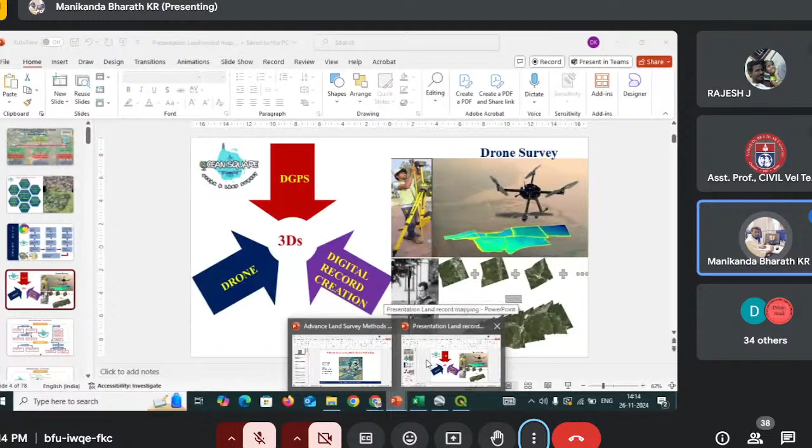The topic given is advanced land survey methods and technology. This is the topic given, but the FDP topic is recent advancements in geotechnical engineering. So we'll discuss advanced land survey methods and technology and how it is effective or useful in the geotechnical engineering aspect, covering this across 53 slides. I have two presentations, one will be 53 slides and one will be 78, so don't worry, the most important things will be explained.

These are mostly theory content, and we also have images. I will explain the theory content within a span of 30 seconds or so for what is given, so you can go through the PPT chat for that. Mostly we'll be going through the images, and I will be explaining them. For a period of 45 to 50 minutes, these two presentations will be covered.

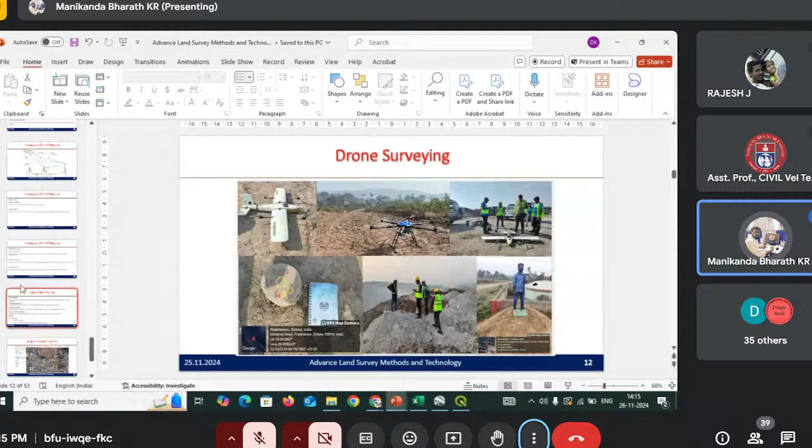Then afterwards, I have two videos which we recorded in our initial working days, which I can also share - I have a hyperlink video regarding RTK DGPS, how it will be operated, how the points are obtained, and also regarding drone surveying, how the mapping will be done. So some half video will be available. For the last half an hour, these two videos will be shared, and I will explain by pausing the videos.

This will be the presentation format, so I will just dive into the presentation. Advanced land survey methods and technology - how it is useful in geotechnical engineering.

Survey methods go hand in hand with geotechnical engineering, mostly when dealing with geotechnical work like metro projects. In metro projects, mostly in underground earthwork excavation, geotechnical engineers come into play. For those geotechnical engineers, surveying is most important - they will be seeing the slope line, slope stability, and the retaining walls. For all those things, surveying is essential. So in those aspects, what are the advanced survey methods available?

I'm not going to touch even about total station because it has also become outdated. The recent trends are RTK DGPS survey - that is real-time kinematic differential global positioning system - then drone surveying, that is unmanned air vehicle, then LiDAR, then 3D laser scanning. Then GIS and remote sensing comes into place.

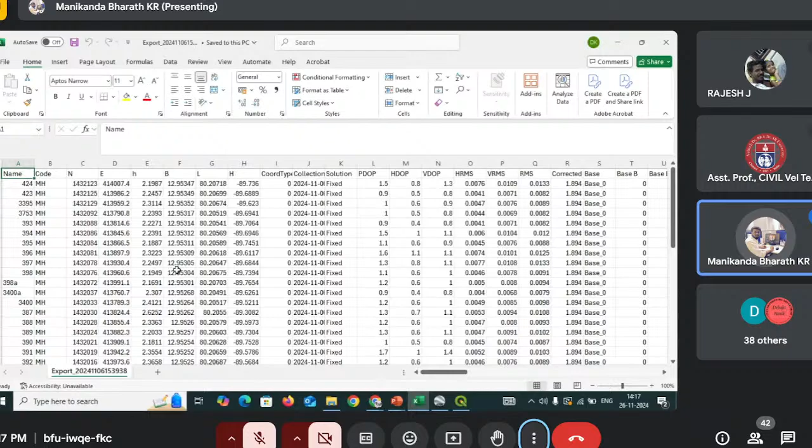After doing all the surveys, it will be mapped and those points will be obtained. With these two slides, I will also explain how those values are obtained in the comma separated value - CSV - and in Google Earth Pro KML format, keyhole markup language, how it is obtained and how this data is input into the QGIS software, that is quantum GIS software, and how the projects are going on. Since it is an industry perspective, I will also explain regarding real-time projects and the industry perspective.

So why these advanced land survey methods and technology? For improved precision and efficiency in geotechnical engineering - traditional methods like chain surveying are all traditional methods, and to improve precision and efficiency, we are going to advanced land survey methods and technology. That's an important thing. So what is land surveying and geotechnical engineering? Land surveying is the measurement and mapping of land.

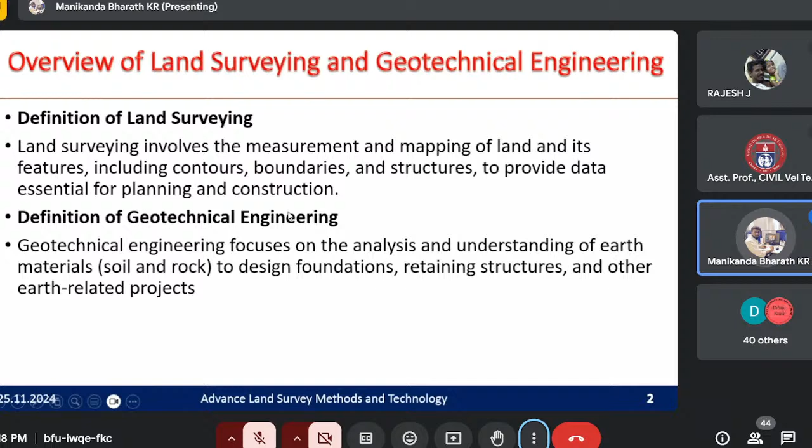So that is land surveying. Geotechnical engineering involves understanding of earth materials, that is soil and rock, to design foundations. So this is with respect to the definitions.

So the overview of land surveying and geotechnical engineering, and the relationship and importance, how land surveying is related to geotechnical engineering. These are interdependent disciplines, working together to ensure safe and efficient infrastructure development.

How is it important? Accurate terrain modeling, site investigations, and foundation design. For example, land surveying provides precise topographical data, which is essential for geotechnical engineers to analyze site conditions like slope stability and drainage patterns.

For example, in mining areas, it will mostly be subjected to slopes, and in metro projects also it will be subjected to slopes underground. So to understand slope stability, land surveying methods will be employed. Also site investigation, for example boreholes, trenches, geophysical surveys. If you're doing boreholes, those can be marked in the DGPS survey, and the latitude, longitude, elevation of those boreholes can be obtained. That is how it is interrelated.

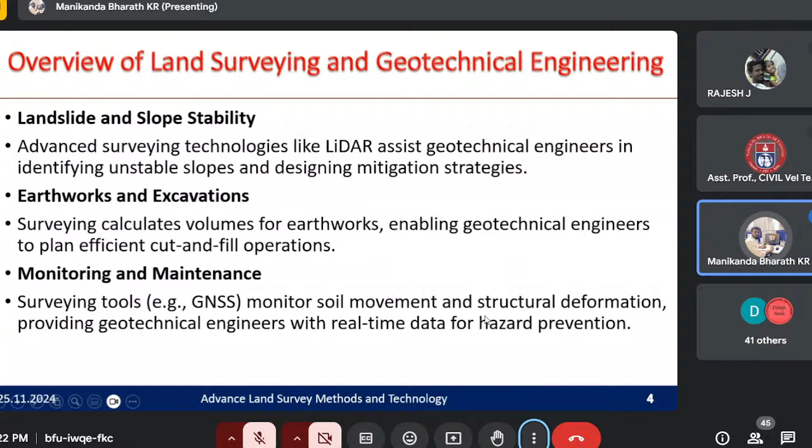So these tools are used for monitoring soil movement and structural deformation, such as soil erosion, and settlement can also be obtained. This gives improved accuracy in subsurface investigations versus limited precision in manual methods. Traditional surveying challenges in geotechnical work include time-consuming processes and difficulty with inaccessibility.

For example, with land surveying and even total station, it may be difficult to reach inaccessible areas. For example, if climbing a steep slope in a hilly region using the total station, a surveyor may find difficulty moving up the hill area. In those situations, we can use a drone survey, an unmanned air vehicle, which can be used to plot the latitude, longitude, and elevation of particular slopes. Using that, we can easily find out the data.

Traditional methods are time-consuming processes, whereas these modern advanced surveying methods can finish the work in quick time. So that is with respect to how advanced land survey methods are in hand. It goes hand in hand with geotechnical work, that is how it is related.

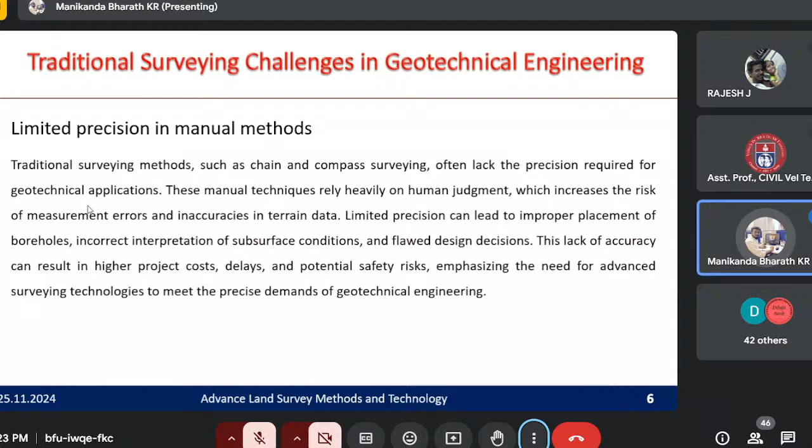Then the ground penetrating radar, GPR. We call it GPR survey. For example, in Chennai metropolitan city, we have a water network and sewer network. The water network is for drinking water, and the sewer network is for drainage purposes. Water is supplied through pipelines from the metro water department to households, and drainage is collected and connected to manholes, through which the sewer network is carried out.

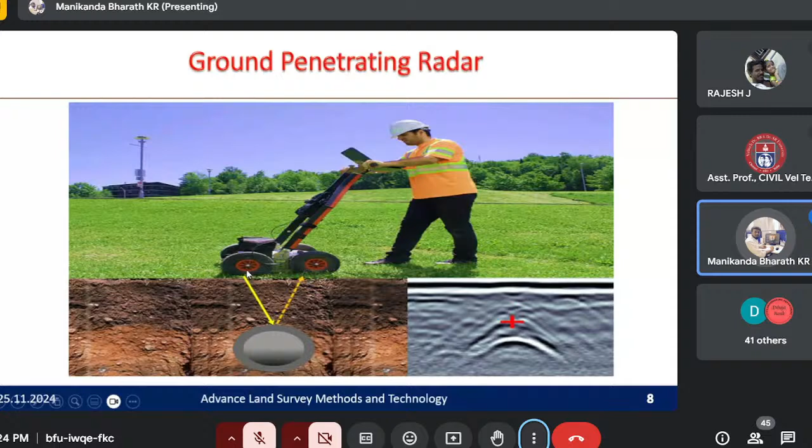For example, if there is a leakage in a particular pipeline, using this ground penetrating radar, it is moved on the road to find where the pipeline is located, at a particular depth of maybe 10 meters, 20 meters. This is how ground penetrating radar works - it sends signals and measures the time taken to reach back, and by this we can identify exactly where the pipe location is.

All this data is obtained and processed - that processing is the most important thing. Using drone surveying, we can find out the latitude, longitude, and elevation of a building by just flying the drone around it. All these things can be done, and we can also give the plan of the existing building.

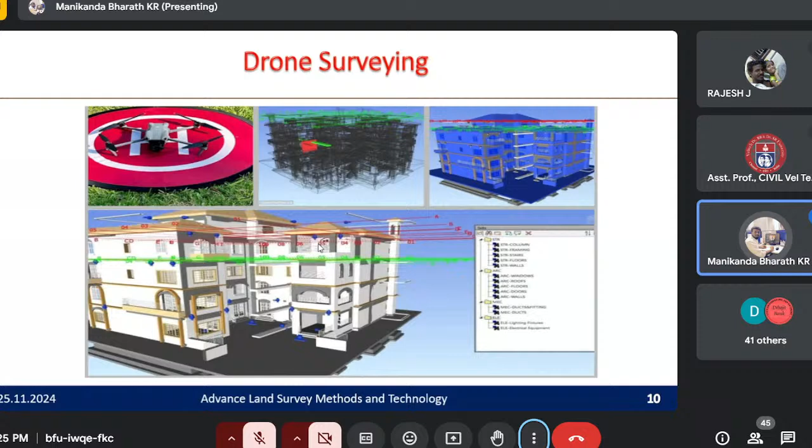For example, we were involved in a project in Kannagi Nagar in Chennai - you can see the drone surveying here. Why was this project done? The Kannagi Nagar buildings have water tanks placed on them, so the elevation of these water tanks, the trees planted near the buildings, and the road elevation and alignment - all of these things can easily be mapped within a span of 2 hours.

Kannagi Nagar is a big area where residents live in apartment-type buildings. All these things can be mapped using the drone. But before that, we have to get permission from the authorities, as there are red zones, yellow zones, and so on. We have to get permission from concerned authorities if it is a red zone. So this is drone surveying, you can see here.

This is what we call in normal surveying a benchmark or ground control point. This ground control point has established latitude, longitude, and elevation. Over a period of 8 to 36 hours, surveyors would have done static DGPS surveying to finalize the latitude, longitude, and elevation of this particular point and made it a permanent benchmark - that is the ground control point. Since we know these values, we can mark them at the base station, and those values can be fed into the rover.

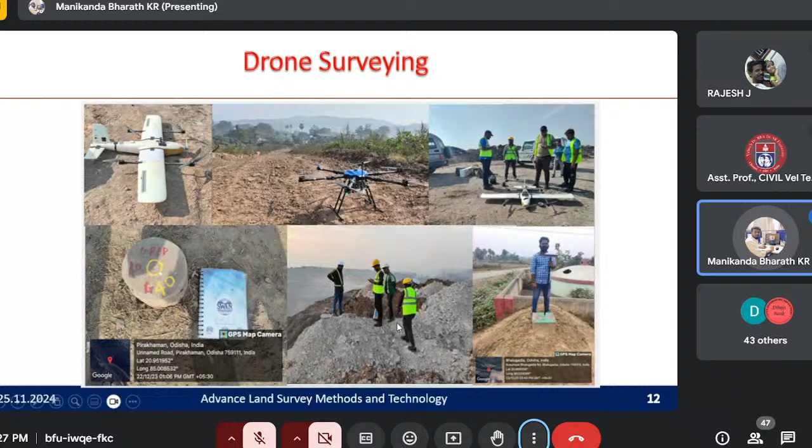This is the rover, we call it a rover or receiver unit. Using this, we can send satellite signals to the drone. This is used for quarry or mining purposes also - you can see the ground control points here, with UAV drone data accompanied by high resolution imagery.

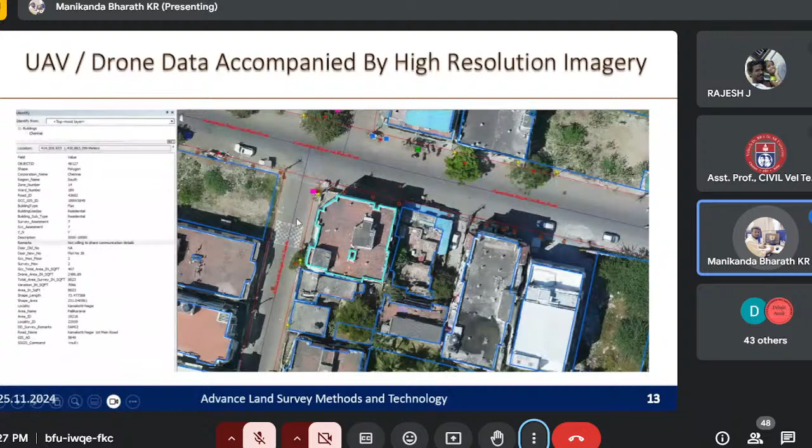After obtaining the data, this is the high resolution image obtained, which was done in Kannagi Nagar. After obtaining this, we can see the road alignment and width - we can measure the width of the road. You can see trees planted here, and we can count the number of trees. For example, in a planned city, we need trees to be in proper alignment along the road, so these things can be monitored using these surveys. That is what I'm trying to say.

So advanced land survey technologies. Moving on from drone surveying, lidar. Lidar in geotechnical applications.

How is lidar useful? Lidar is light detection and ranging. First, using this lidar, they will be sending some laser pulses. Lidar systems emit laser pulses that travel toward the ground and reflect back to the sensor. The time it takes for the pulse to return is used to calculate distances. So they send pulses, it reflects back to the sensor, and the time taken is used to calculate distance. That is the simple basic thing. Using this, they will be creating...

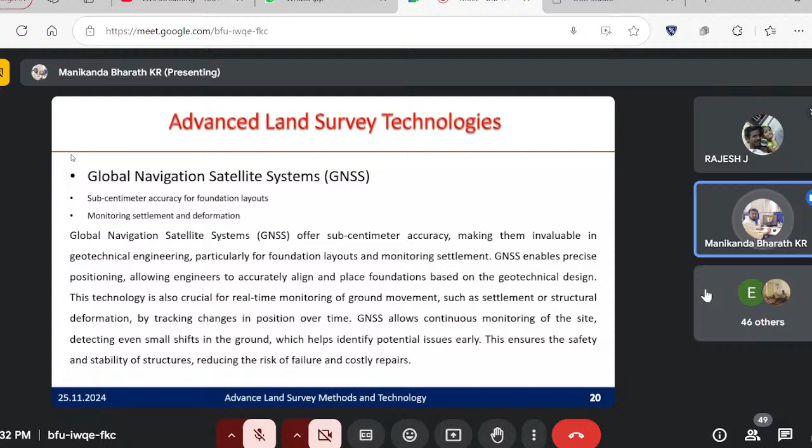It plays a major role in monitoring the settlement and the deformation.

Then drones and UAVs: rapid aerial surveys of construction sites and terrains, then real-time data integration. So how does this drone work? They will be equipped with some sensors and cameras. What are the cameras? RGB cameras, thermal cameras, and lidar also will be employed in the drones. So those drones will have some more weight. Then photogrammetry systems will also be employed.

So these cameras will capture the images and transport them in real time to the base station, and those things can be viewed from the site also. UAVs fly over construction sites or terrains, capturing aerial images or lidar point clouds. So what can we obtain: detailed imagery, elevation data, and subsurface conditions. How can subsurface conditions be obtained? Through thermal or lidar scanning, it can be obtained.

So photogrammetry uses overlapping images to create detailed and georeferenced 3D models of the site. Then the obtained data from the drone will be processed. How will it be processed? Data collected by UAVs is transmitted to a base station. I will be showing images of these base station things for easy understanding in the upcoming slides.

So data will be transmitted to the base station, and in that base station it will be processed. How will it be processed? Using software like Pix4D or Agisoft Metashape. You can see here the images I have shown, right? So this is how it will be processed.

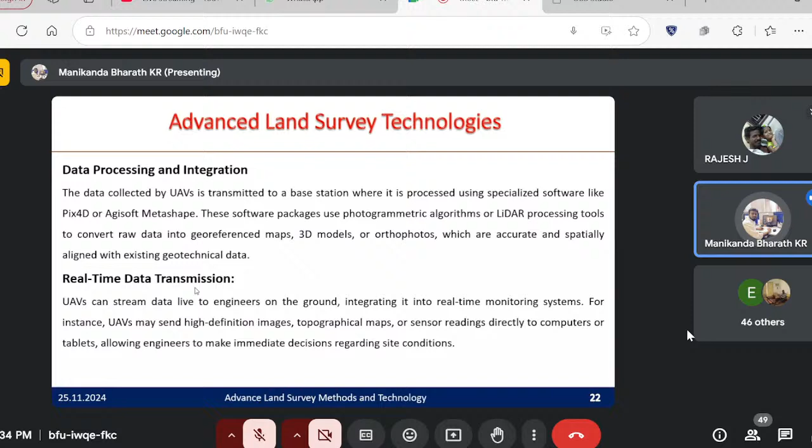Then analysis and site monitoring: we can get borehole information, soil analysis, and geophysical surveys. The data obtained from the drone can be overlaid with existing geotechnical data. For example, you would have the bore log report, and with that bore log report we can use the processed data - borehole information, the distance between boreholes, the exact elevation, latitude, longitude of that borehole, and the type of soil available.

So all those things can be used to detect anomalies also. For example, rapid identification of soil instability or drainage issues can be assessed by comparing 3D models of the site over time. That is what I'm explaining: if you do a drone survey today, and do another drone survey in one week's time, over that period of time, how it is changing.

If that site is subjected to some slope instability, over a period of time we can identify how much it is affecting using these surveys, looking for signs of deformation and erosion. So this enables enhanced decision making, and these things can be done within a short period of time.

Moving on to 3D laser scanning, this is also one of the advanced land survey methods. Using 3D laser scanning, we can capture rock mass structures and subsurface data. This also employs lidar, light detection and ranging.

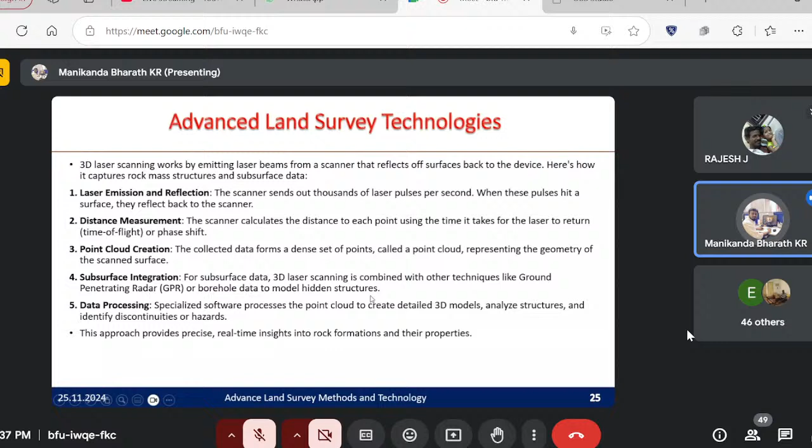Moving on to GIS and remote sensing. All the data obtained from drones and 3D laser scanning will be processed in software like Pix4D and Agisoft. Then in DGPS, we obtain some data, and all those data can be marked in the GIS.

GIS is a geographical information system. Real-time point data will be collected in a format called KML, keyhole markup language, or CSV, comma separated value, which is similar to an Excel sheet. Those files can be imported into software called QGIS and ArcGIS.

Using that, points, lines, and polygons can be plotted. Then we can give attributes to those points, lines, and polygons, and form it as a geodatabase, GDB. It can be used for future purposes for easy understanding of where it is located.

For sewer networks and water networks, currently CMWSSB, Chennai Metro Water Supply and Sewerage Board, is mapping the water and sewer network for easy understanding. Wherever they are providing drainage system or water network, they're mapping it using RTK DGPS survey. All of this is being completed within 2025.

So in future, if there is any leakage in a particular house or street, it can be easily identified. Just like in Google Maps we go from our home to Central Railway Station by typing the name, likewise the points obtained using the DGPS survey will be available with the Metro Department officials.

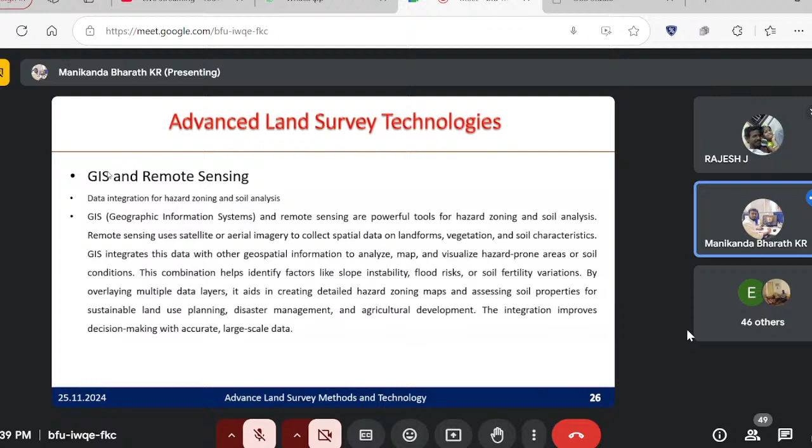Then remote sensing: using remote sensing satellites, artificial intelligence is also used now. You would have come across the open source software called Google Earth Engine, which uses Python programming. Using Python programs, they obtain satellite images, and those images are processed. Using those satellite images, we can also obtain soil data sets, which I will show in upcoming slides.

With that soil data set, we can see whether it is a clay region for 0 to 25 centimeters, 25 to 50 centimeters, then up to 150 centimeters, we can obtain the soil data sets throughout the world. That is with respect to remote sensing.

After obtaining the soil data set, we can map it, and it is also useful for research purposes. If you are writing a paper where you are working on clay soil, you can just map where it is located using these remote sensing satellites.

Then it is integrated into GIS software, that is QGIS and ArcGIS. So you can see soil maps, geological data, and climate data also can be used. Then layers like slope, elevation, land use, land cover also can be done. For example, flood zones and landslide prone areas can also be marked. This is how it is related.

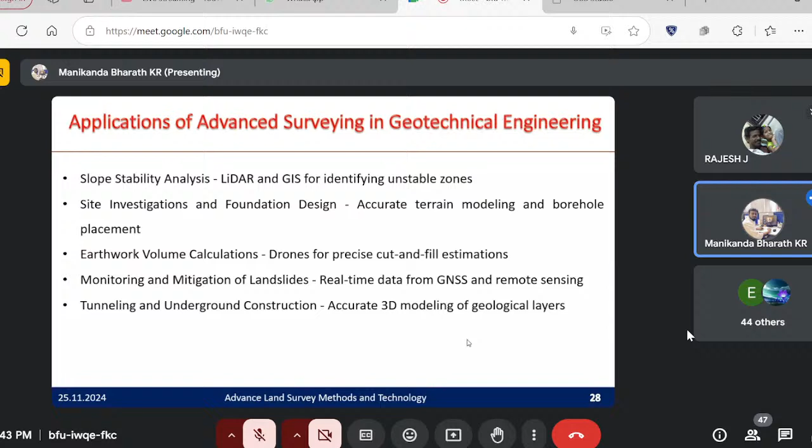Then smart geotechnical monitoring systems - integration of IoT sensors, Internet of Things, and surveying technology. Sensors can be placed such as strain gauges, inclinometers, and piezometers to collect data on parameters like soil movement, stress, and groundwater level.

These strain gauges can be placed on a particular surface, and for example, if there is movement in the soil, or if a particular place is exposed to more stress, or if the groundwater level increases, it will be notified to the sensors. Using that, they can easily find out the values. This is how these sensors transmit data wirelessly to centralized systems for analysis.

Surveying technologies like GPS and LIDAR complement this by providing precise spatial and topographical measurements. The integration enables continuous monitoring, early warning of potential hazards, and data-driven decision making. These systems are widely used in infrastructure projects, for example mining and landslide areas, to enhance safety, efficiency, and sustainability.

So how it is done is explained here. First, they deploy the IoT sensors - strain gauges, piezometers, and inclinometers. Then they collect the data, which is transmitted wirelessly. Then using that data, surveying integration is done - using GPS for localization and LIDAR for accurate spatial context.

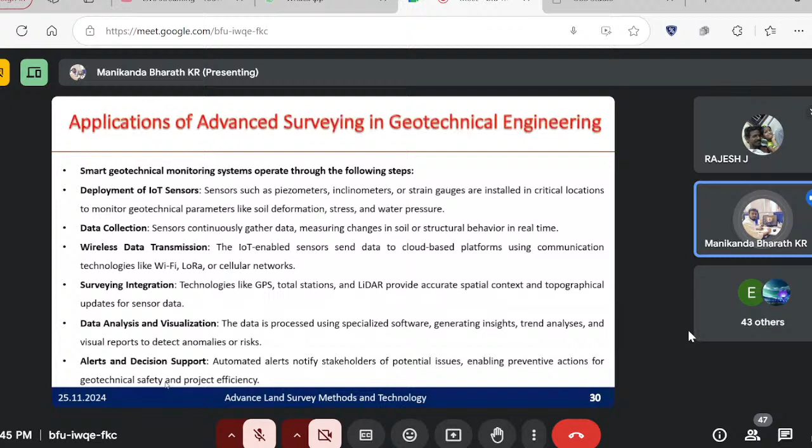Using that, they will be plotting in the software. Then the data will be analyzed and visualized. Then alerts - after visualizing, they will give alerts whether the soil has moved, whether the soil is eroded, or whether some settlement has occurred, whether the slope has increased, or whether the vertical steepness has increased. So all those things can be employed.

So up to this point, we have seen the advanced land survey methods - that is drone surveying, UAV, unmanned aerial vehicle. Then RTK DGPS survey I'll cover in the upcoming slides. Then we have gone through LIDAR, light detection and ranging, and 3D laser scanning also.

GNSS, that is navigation satellite systems, plays a major role in DGPS survey. We have images showing how it works. If all these things are done, we can find out slope stability, foundation marking, foundation layouts, soil movement, and settlement of soil. All these are also done in tunneling. This is how advanced land survey methods are useful in geotechnical engineering. The two most important points are improved accuracy and efficiency in the shortest span of time.

In the Oysand region in Norway, this project focused on a man-made slope affected by freezing and thawing cycles. They conducted field and laboratory tests, then undertook numerical simulations to understand slope stability factors, employing techniques like finite element modeling and geotechnical monitoring systems.

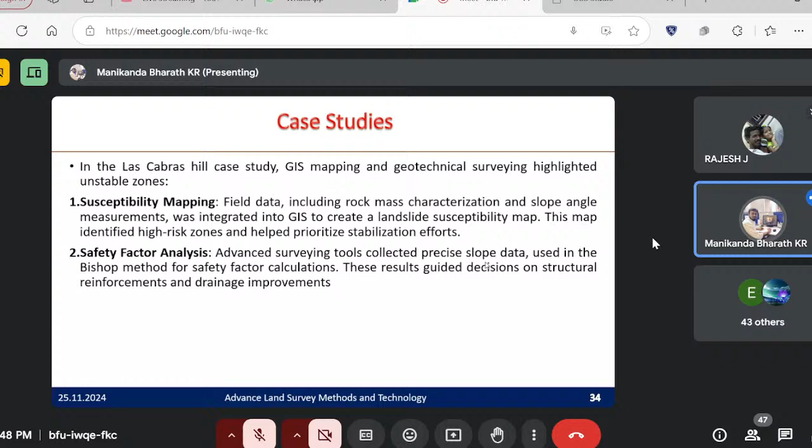Advanced surveying tools collect precise slope data, again using aerial survey and LiDAR scanning, with respect to slope stabilization. That is a successful use of advanced surveying in slope stabilization, and that concludes the first case study.

Moving on to another case study: integration of GNSS and LiDAR in large-scale infrastructure projects, specifically the high-speed rail project in California. I'll explain the background. The California high speed rail project is the largest infrastructure initiative in the United States, a 520-mile network.

It involves large-scale earthworks, viaducts, tunnels, and station facilities, both underground and on the surface. Given the scale and technical challenges, precise mapping, alignment, and monitoring are essential to ensure the success of the project. The objective is to enhance survey accuracy, streamline the construction process, and ensure proper alignment for the rail system.

As I already said, Chennai Metro also employs these advanced surveying techniques. Some surveyors use total stations, others use RTK DGPS survey. With RTK DGPS survey, real-time kinematic, when you move the rover in real time, it gives latitude, longitude, and elevation. Using that, we can mark points and determine the alignment, whether it's a straight line or a curved line.

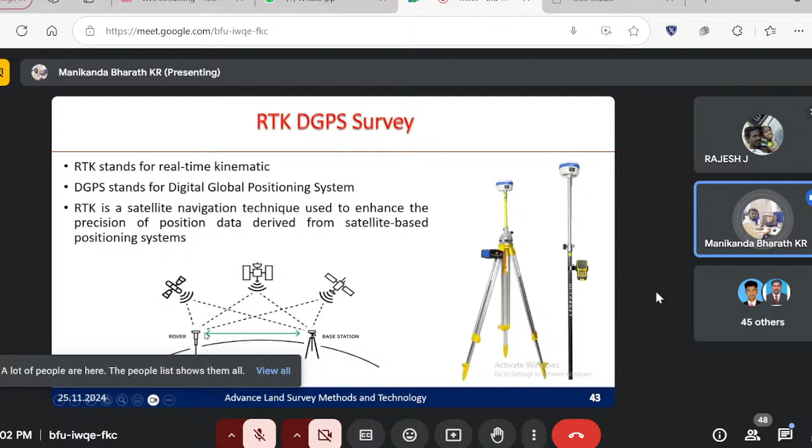This data will be fed into this controller. Then this rover will be connected to the controller. Since the controller is connected to the base station, the signals will be transferred from the rover to the controller to the base station. The data given from the rover will be transferred to the satellite, then it will reach the base station. Similarly, from the base station, the data will be sent to the satellite and it will reach the rover. So what data we can collect from this will be discussed in the upcoming slides.

So base station - what is a base station?

A base station is a known fixed position station that receives GPS signals and calculates corrections. This one is what we call a tripod, and this is the base station. We have a known latitude and longitude. You can see here a particular round shape structure - this is what we call a ground control point.

For example, Chennai Metro Water Supply and Sewerage Board - in every area there will be a metro water tank, and on top of the metro water tank or drainage building, they have established some ground control points.

So how is this ground control point established? For a period of 8 to 36 hours, they have done static surveying. Using the base station, they send signals to the satellite - that is GNSS, Global Navigation Satellite System - and obtain data for a particular point over a period of 8 to 36 hours.

After obtaining that value, it will be corrected. For every second, the data will be corrected, and after a period of 36 hours, the exact latitude, longitude, and elevation will be fixed.

That data will be given to the surveyors as an Excel sheet or as a keyhole markup language, that is KML format. If they click on that point in Google Maps, using the navigation route map we can just reach that point using Google Maps also.

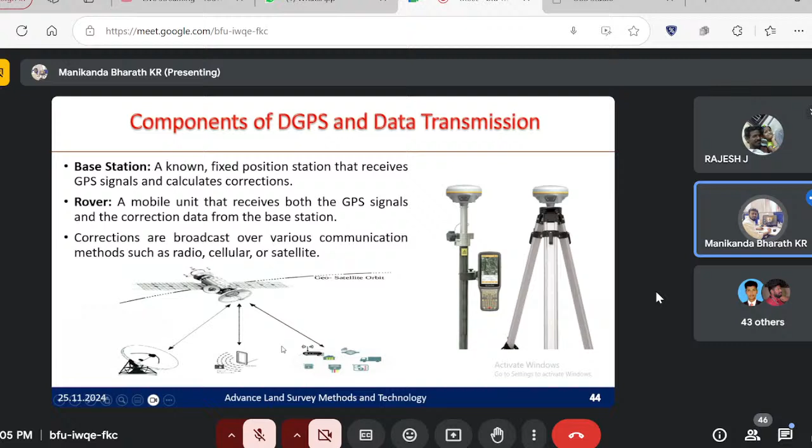Then preparation: objective definition. Define the survey's objective - for example, if you are going to find the cut and fill of a surface, that is we are going to find out the elevation. We are just defining the objective of what we are going to do.

Then equipment check - ensure all DGPS equipment, that is the base, rover units, and communication devices, are in good working order. Then site reconnaissance - first we identify the survey site, then identify the potential obstructions and assess the environment. Then base station setup.

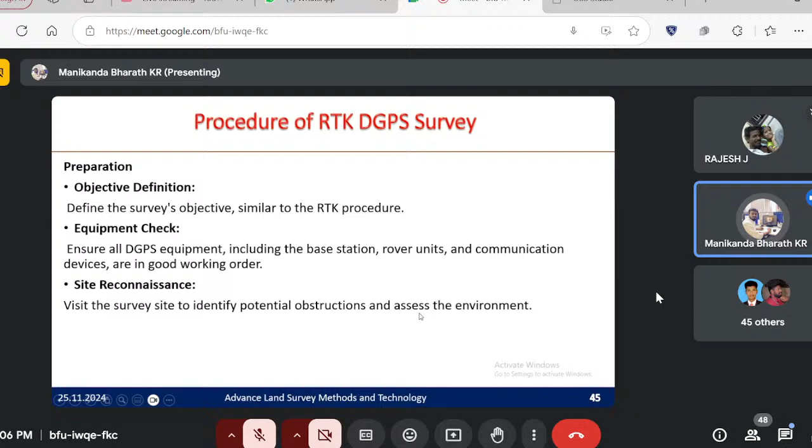So now these things are explained in theory format. I will play this video for your easy understanding - whatever is said is explained in this. You can see here the base station, rover, then transmission antenna, initialization - all these things will be explained in that video.

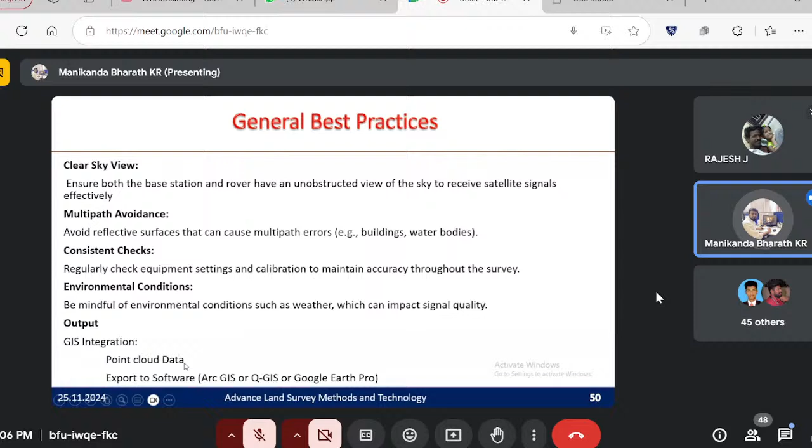The final one is output and GIS integration. The output will be obtained as point cloud data, then it will be exported to software like ArcGIS, QGIS, or Google Earth Pro. This is the output in Google Earth Pro.

Moving on to drone surveying - I'll just complete this, then I will play the video. Drone surveying with real-time kinematic: drone surveys also employ the RTK method, so drone surveying and DGPS come hand in hand.

DGPS is also essential for drone surveying. Why? They will be geo-referencing a particular point using the DGPS, so a latitude, longitude, and elevation will be marked. By using that point, the drone will keep it as a geo-reference point. After keeping it as a geo-reference point, it will move on to the area of interest and collect data - it will be collecting the images.

Using those images and using that geo-reference point, we can plot our area of interest with latitude, longitude, and elevation. It integrates advanced GPS correction techniques with UAV, unmanned aerial vehicle technology, to enhance the accuracy and efficiency of aerial surveys.

I also have a video related to this.

So I will play the video, but before that,

So far I have discussed the importance of advanced land survey methods in view of geotechnical applications, and how these advanced land survey methods are done, that is the procedure or working principle from an industry perspective. So, RTK DGPS.

Hello everyone, this is my friend. He has done this video.

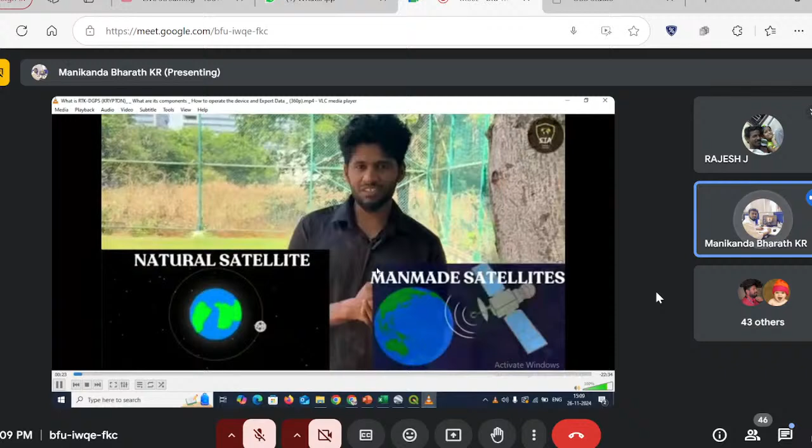It's a 22 minute video, but I will fast forward whenever necessary, and whenever necessary I will pause and explain.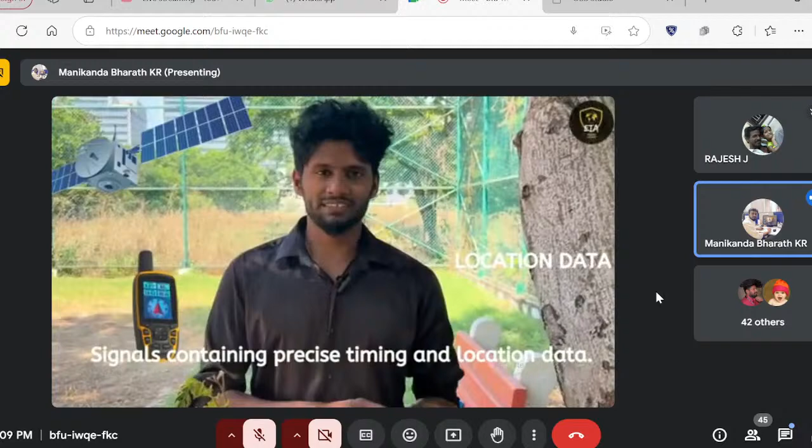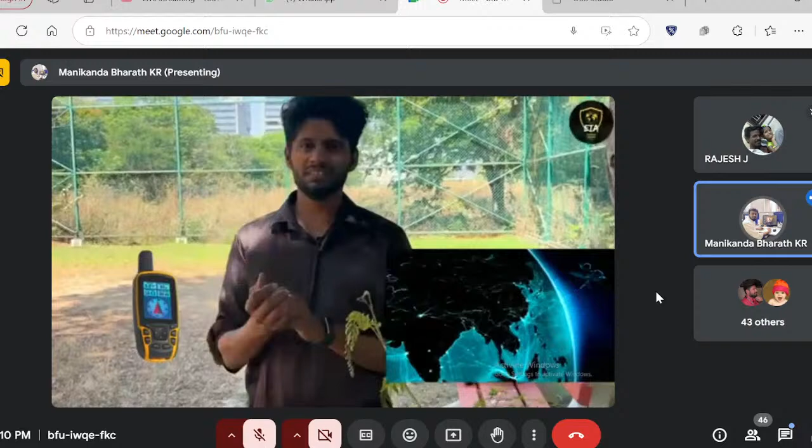Okay. that we continuously send signals to the Earth. Earth is orbited by this network of artificial satellites, and the information contained by these signals are two informations. One is timing information and location information. Both these data will be continuously sent by the satellites. Next, we will see about the receivers. So, what is the function of receiver? The receiver will continuously receive the signals from at least 4 satellites, and with the help of these signals, the GPS receiver can calculate the exact position on Earth's surface. However, due to factors like atmospheric interference and satellite errors, there is a problem with accuracy. That's where DGPS comes in. DGPS means accuracy by providing correction signals from fixed base station to GPS receiver. However, for tasks requiring even higher precision, there is RTK DGPS. So, what is RTK DGPS? RTK means real-time kinematic, DGPS means differentials. Now, we will see the components of RTK DGPS in detail.

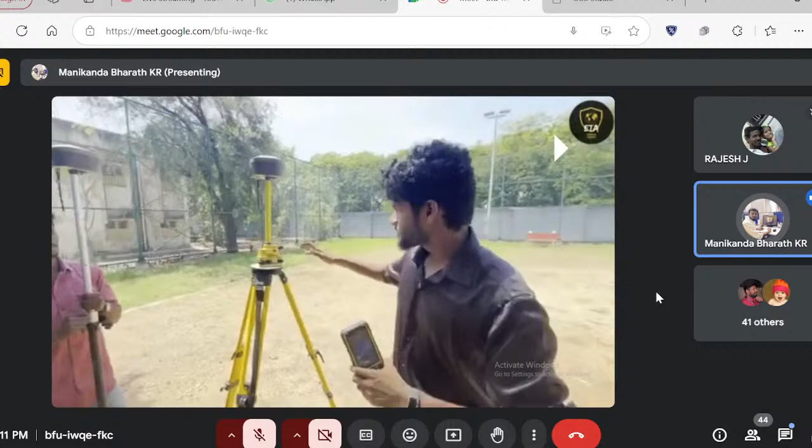RTK DGPS has 3 important components. One is So this one is a tripod. This one is a tripod. So this one is a pole, and this one is a base station GNSS receiver, and this one is the controller which is base holding. as well as rover receiver. So this one is a This is rover. just like a Okay. mobile phone. You can see here, you can make calls, you can insert SIM cards, we have a camera as well. All the features in the mobile phone will be available in this controller.

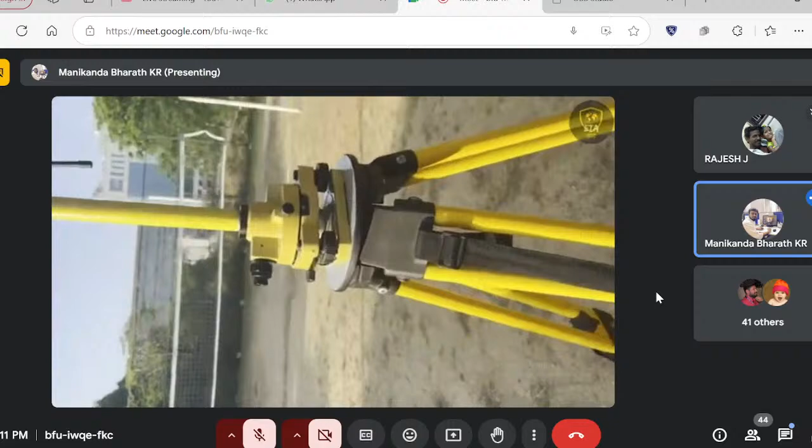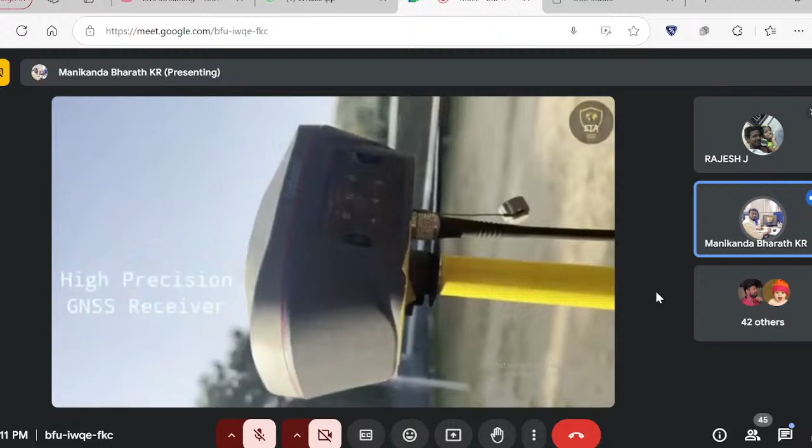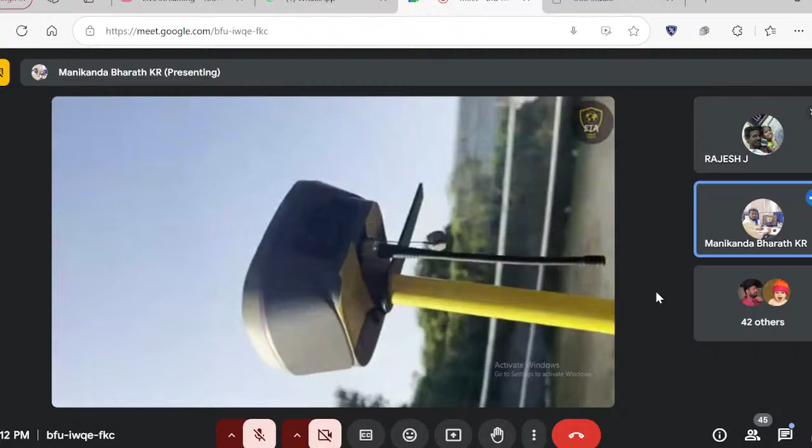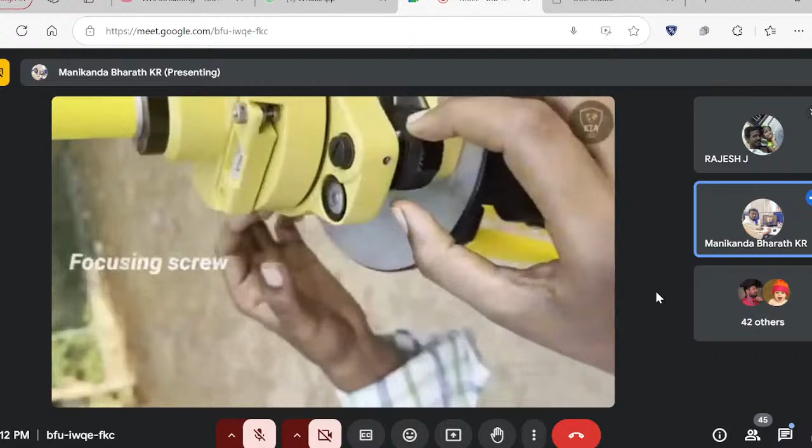So in this device, the base station plays a critical role as the reference point for the entire system. Now we will see the components of this base station very detailedly. The base station consists of a GNSS receiver. Now this is called as the GNSS receiver. It locates at the heart of the base station, and it is a high precision GNSS receiver. This receiver continuously tracks signals from GPS, GLONASS, Galileo, or other satellite constellations to determine its own precise position. Next, we have this antenna. Now, this one is called as the antenna. A high quality antenna is very important for optimal reception of satellite signals. So we can see the bottom of the base station. It consists of a tripod here, and you can see the tribrach available here. And here it is the focus lens for centering, and you can see the level screws for here. Then you can see the spirit levels, so which is used for centering and leveling. So at the bottom of the tripod, you can see the accessory for centering purpose.

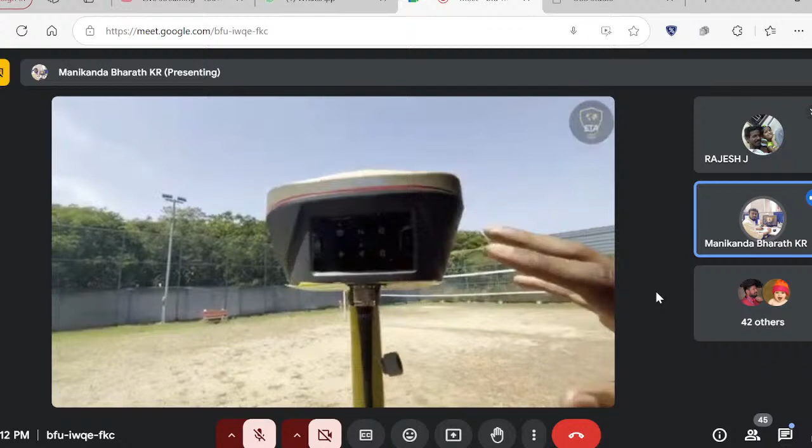There are many models in RTK DGPS like Trimble, but today we are going to see this Krypton model. To switch on this base station, you have to long press on this power button.

You can see here a green light, which represents battery. The device is switched on, and we have Bluetooth connectivity.

For taking the points, this first option helps to identify whether we are receiving the satellite signal or not. Keenly watch that once switching on the power button, after about 1 minute, this satellite option will appear in green color, blinking, which means we are receiving the satellite signal.

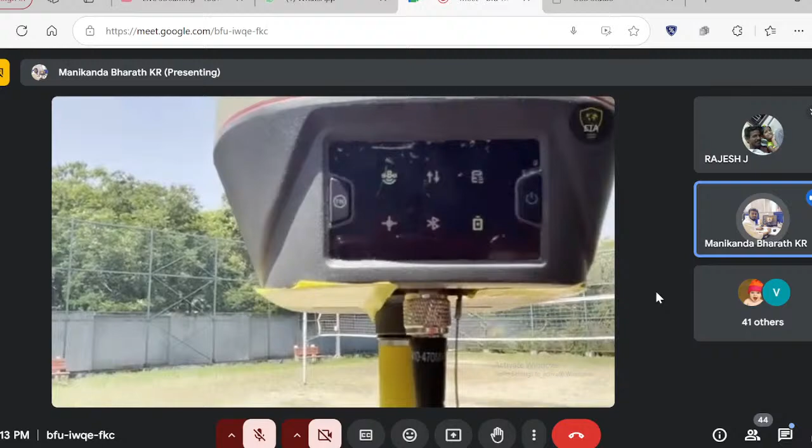One more important point is that a base station should always be placed at a clear, open skied place, because only then can you easily get the satellite signal properly.

The first step is we have to connect this controller with the base station. You can see here this controller, just switching on the power button here available. So just moving on.

You can see here there is an app named Nuwa. This app is also available in the Google Play Store. You can download it on your mobile phone also and use it as a controller there. So I'm just opening this Nuwa app here.

This Nuwa app has four icons here. The first one is the project menu. In that project menu, you can see project, CRS (coordinate reference system), code, point, line, road, and export and import facilities also available here. Then the settings tab, cloud settings, and more.

Moving on to the next icon, it is the device menu. In the device menu, you can see the connect option is available, data terminal, base station is available, you can connect with the rover, then NMEA output, device tab, and more facilities also available here.

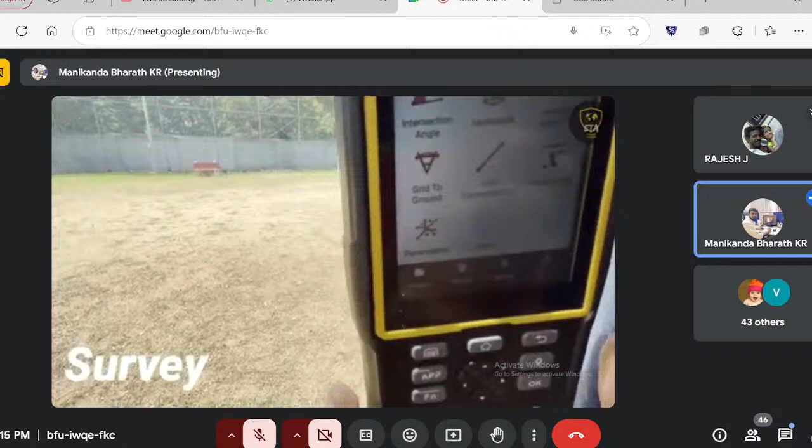Then moving on to the tools menu: area perimeter, azimuth distance - these things can be done. Then offset point, rotation point, 2 point intersection, 4 point intersection angle, earthwork, angular bisector, grid to ground, line segmentation, points average, then parameters, and more facilities are available.

Before creating any survey operation, we need to create a new project. For creating a new project, click on this project option, and we have an option called new. Select this new, and it will ask you for the project's name. You can enter the project name.

I will type here as STA, and the creator name will give it as EBC. By default, it will update the creation date, and we have the coordinate system and all the other information. Just click OK, and now a new project will be created.

Now a new project is created named STA. If you want to open a previously worked project, you can see here in the options, the previously worked option will be available. Now we have successfully created a project called STA.

We will make changes to the coordinate reference system if needed. Click this CRS. This is an important thing before doing the survey, the coordinate reference system.

Using the WGS 84 coordinate reference system only, we will be obtaining data. For the Tamil Nadu region, it is WGS 84 zone 44 north, that is EPSG 32644. That is a code name. EPSG is European Petroleum Survey Group, and they have given some values for this.

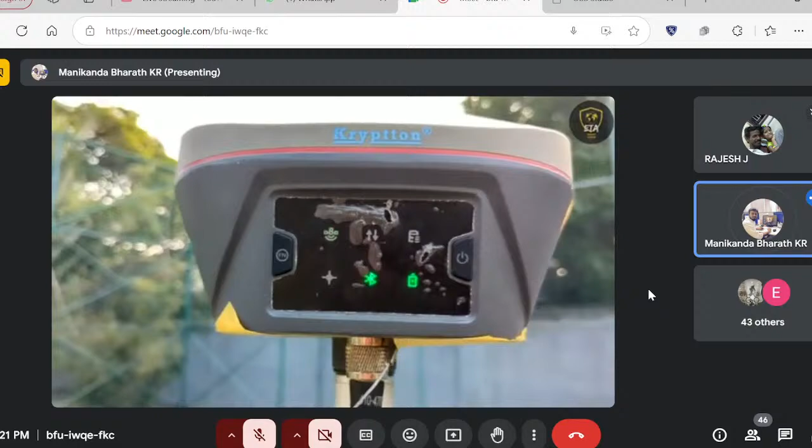So similar to the base unit, the rover unit is also connected with the controller. So then we are going to say that this portion is the rover unit. Just click on the rover. You can see the status, ping status. Okay, so just do that. Now just give connect and see it.

Okay, so far we have connected the controller and the rover unit to Bluetooth connection. You can see how it is going. You can see that 305 serial number is the rover unit serial number. So we have connected this controller with the rover unit.

Just click on the radio, internal radio, then give detail. Just select detail. You can see these values are available, and the protocol also. So all these are default values. Just click on OK, then just click on start.

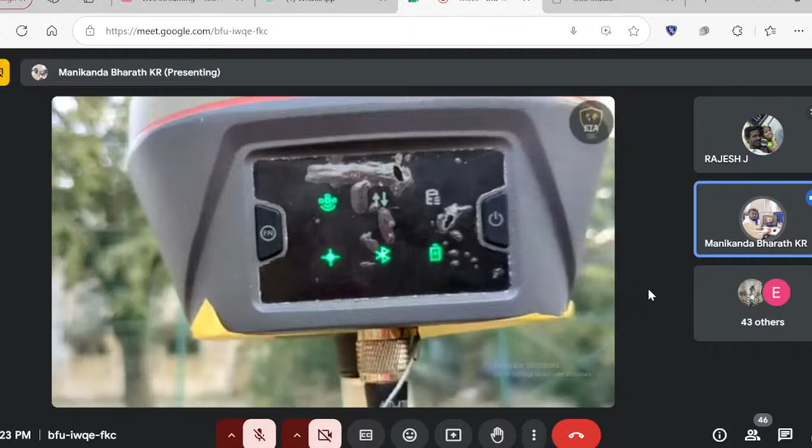So you can see the rover is configured successfully with this controller. It is evident here. You can see that up arrow and down arrow is blinking in green color, and at the left side you can see the point is fixed. So using this, you can start the project. We have configured the rover successfully with the controller.

So then we are moving on to the project. You can see we can fix the points now. Before that, we have to fix the height of the rover unit. So you can see the height of the rover unit.

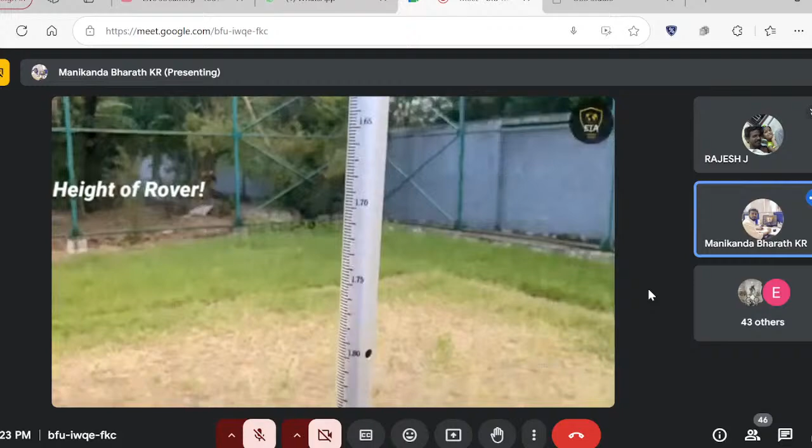So this is a rover unit, mounted on a pole. You can see the pole height is 2 meters. So the rover is mounted on the pole at the height of 2 meter distance. Mostly 2 meter is fixed, but it can also be varied according to the land conditions. So that's the antenna height. This rover unit has an antenna here, and this height should be fixed based on the pole.

So this is, you can put 2 meters, 2.0. So the antenna height has been inscribed as 2 meters.

So just click on the new project, select new, and just click, and just okay. So new project is created. And see, the new project is created here.

Now click on survey. We are going to survey. So in this survey, just click on the survey. We are going to see the points. Okay, so before placing the point, we are going to see the rover unit spirit level. You can see here the spirit level.

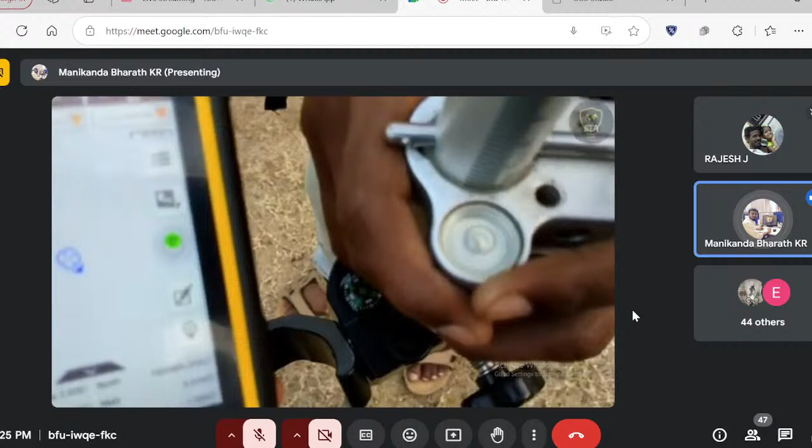So when the spirit level stays at the center, you can see at the left side it shows in green color. If the spirit level is moved, you can see it is showing in red color. So the person whoever is carrying the rover unit should ensure that the spirit level bubble is placed at the center. So once the person with the controller sees the green color signal, then they can click on the location.

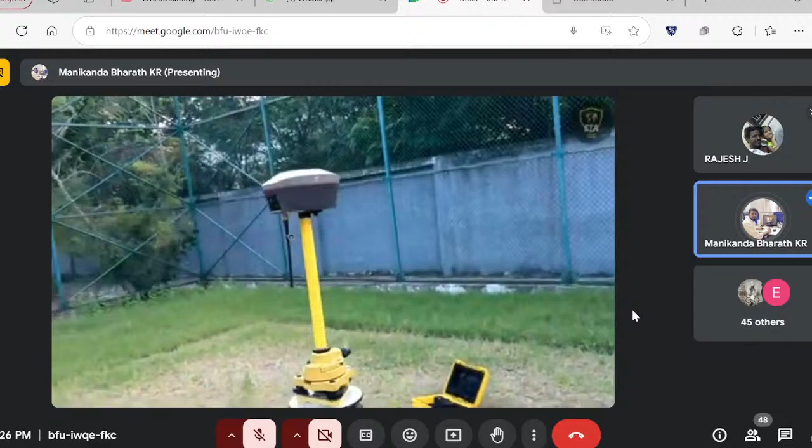So after clicking on the location, you can see we have obtained the values of north, east, and the height is 1.917 meters. This height is from the mean sea level. You can see here the base station is placed here, and from the base station you can see the rover unit is placed here, and the spirit level has been maintained at the center, and using that a point has been fixed.

So this base station height is subtracted and this rover unit height is subtracted, that is the antenna height already input. So those things are subtracted from the ground station point wherever it is available. Then it gives this value, 1.9717 meters, which is from the mean sea level. So just click on OK. So a point has been added. You can see the person is moving this rover unit to another point.

To another point, he has ensured that the spirit level bubble is placed at the center. So once you see it is blinking green, just click on the location.

You can see another point is placed. That point is at a height of 1.9223 meters from the mean sea level. The northing value is also available.

Just click on OK. Another point, that is point 2, has been created. So similarly, you can see the area can be covered and the areas can be obtained. So next, the third point is placed.

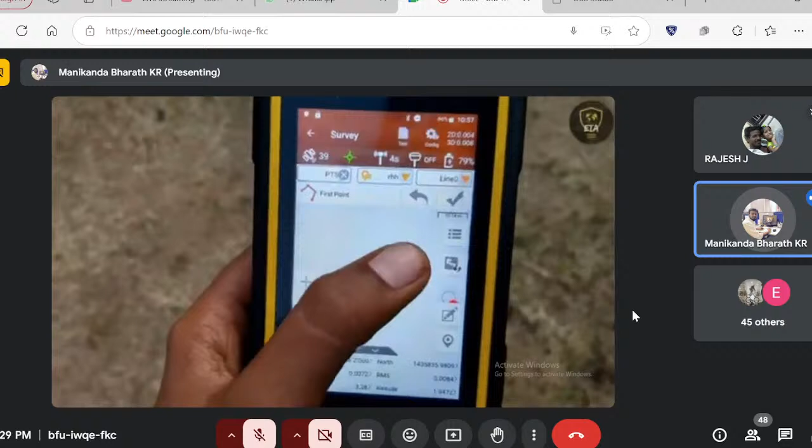So there is one more option above the location point. You can see the edit option available. Just click on the edit option. You can see polyline, polygon, square, diagonal, square center, rectangle, rectangle center, circle are available. You can just click on polygon. Just give the line name and code, and click OK. These things can also be done here.

So we have seen the values of 4 different points on the base station. We can export those values. You can see here, just click on export.

So the first one is coordinate export, then other export is available. In this coordinate export, you can see, just click on all the values available. Just click on detail, yes you need all values, just click on all the values. So all those values are selected. Then the format we are going to select is name, code, and northing, easting, height.

Then the file name, you can give any file name which you want. You can see the storage part is available. Just click on export. But before that, I will explain the other export.

You can see here, one. You can also select the file format which you want. The already existing file format is KML. You can also see shapefile, this point coordinate can also be exported as a shapefile, SHP. Then all the file formats, DXF, HTML, XML. So these are the file formats available.

So we are going to take it in the KML file. You can also export it as a shapefile and use it for ArcGIS, QGIS, or Google Earth Engine purposes. Now I am going to export it as KML, just say the file name and click export.

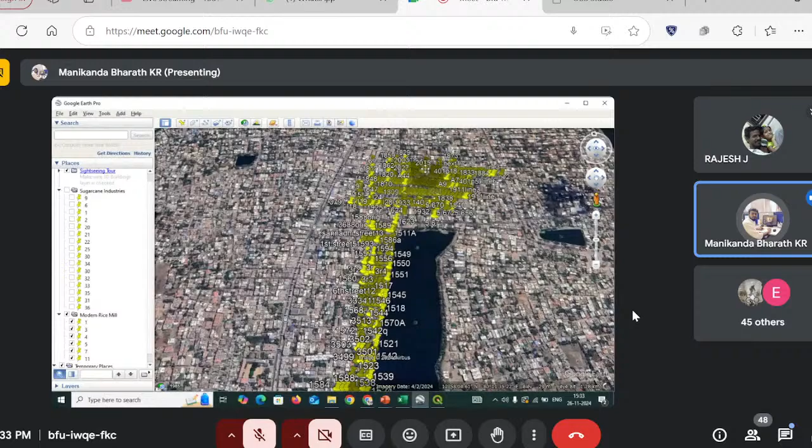Or you can see this one is Google Earth Pro. This is also open source software, available in your Google Play Store and also available in desktop, you can download. So that data which we exported in KML, in the video you would have seen, that data is obtained like this. It has a latitude, longitude, and elevation. So while opening that KML value, I'll just open and show.

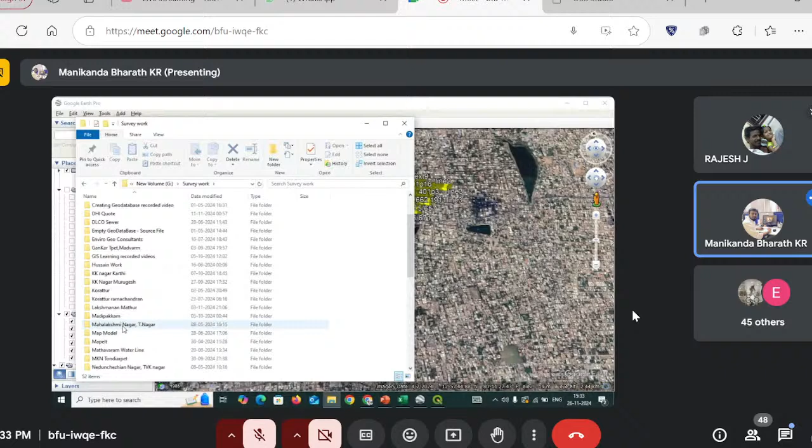You can see, I have just clicked on a KML. You can see, yes. So these are the points obtained from that KML.

So this one is sewer network data. For example, if I click on this point, you can see that point name is 1911, that is the manhole name. So it is HSC, meaning house service connection. You can also see here 143, that is a house service connection. Then 930 MH, manhole. So these data are obtained here.

And using this Google Earth Pro, we can just zoom in and go to that particular location. This one is supported by Google. They will be running some vehicles through all our areas and they will be giving some data. So most people would have come across this.

Then exit street view. In the street view we cannot find these points. After exiting the street view we can find the points located. So this is how the points which we have surveyed can be exported.

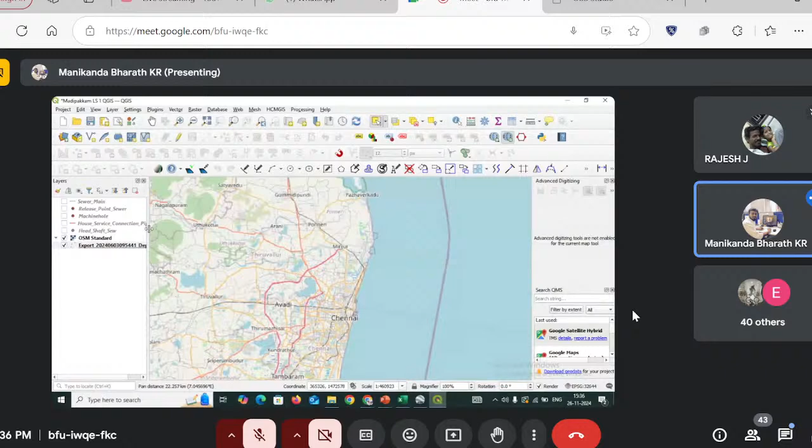So this is a base station. This is an overhead tank, and this is a base station point. So this is the point from the KML.

Okay, so we can just click on the manhole. This is a point. Just click on this manual tracing tool and just click on this point. So by clicking on this point, that database contains attribute fields. So all these attributes are non-spatial data. For example, manhole size, MH material of construction brick, RCC brick. So these are the attributes, and likewise we can fill those values.

So the data is obtained and these attributes are filled. So you can see here.

So this one is with respect to some sewer network we have been involved in. You can see here this is a manhole, and this one is a sewer main pipeline. These are the houses you can see.

These are the houses. So in real time, we would carry a rover unit to the pipeline up to which the house service connection is given. That end of the house service will be the starting point, the mouth of that house service connection. We will keep a point, and in the controller, we will click on that.

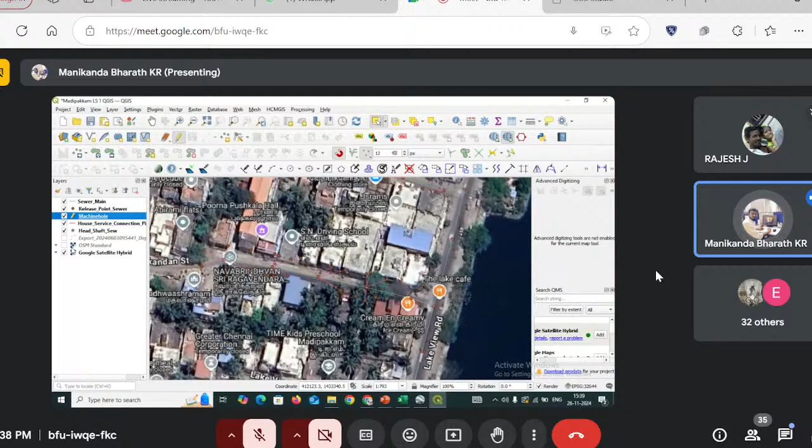This will be decided by the authorities, the construction people, so from where to where it is flowing. For example, this is a head shaft sewer, this is a head man manhole node. From here it will flow, and all these things will be connected to a

sewage supply, sewerage collection point. That is a building, for example you can see this. Here the drainage collection system will be available, and it will be connected to that. So it is one example of how RTK DGPS survey is employed in the sewer network.

Likewise, it can also be employed in the identification of slope instability and settlement, and mostly it plays a major role in cut and fill estimation, that is calculating the volume of earthwork. So this is how QGIS software comes into play. Then we shall be moving on to drone survey, one more video. With that, I will conclude.

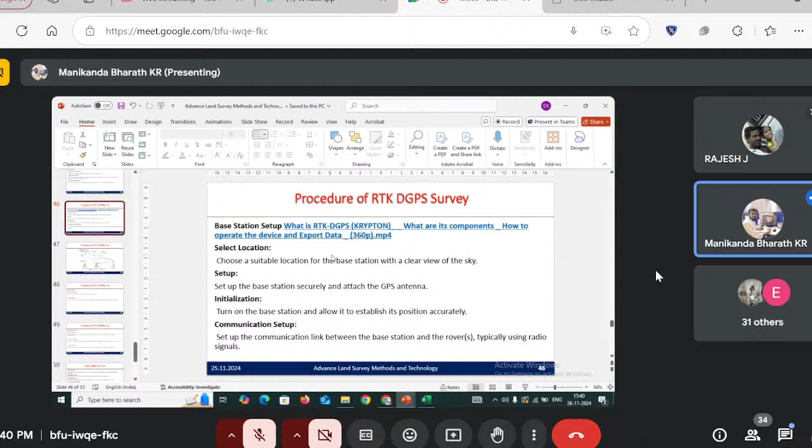So this is the last one, just a few 10 minutes, on how drone surveying is employed in real time.

So this is surveying a lake. With our fellow colleagues, we have surveyed. We can use it.

Drones are not only for wedding photography. We can use it for advanced surveying as well. So you can see here, this white and red one is the ground control point.

Hello guys, today we are at Nathapettai Lake in Kanchipuram area, and we are going to do an advanced survey for this Nathapettai Lake using drones and RTK DGPS. The major problem faced by this lake is that they are dumping municipal solid waste at the corners of this Nathapettai Lake. So we are going to do a detailed survey for this lake using RTK DGPS as well as drones, and identify the boundary of this Nathapettai Lake, the depth of the lake, as well as how this lake is being contaminated and how the aquatic life is getting disturbed because of this municipal solid waste. All these things we are going to survey in detail and present in this video.

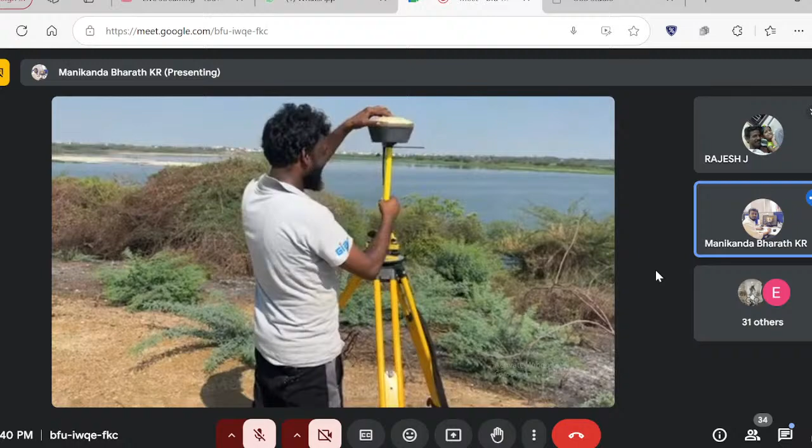And our team is here. They are initially fitting the base station with the help of RTK DGPS. Our captain is fixing the base station. This is our base station for this advanced surveying, and we have fixed our GNSS receiver.

And in between this lake, there is a train track, and you can see a train rolling over the track.

Main problem segment is solid waste management. They are dumping the solid waste in the lake environment, within the lake itself. You can see at the top corner there is a huge deposit of solid waste. They are dumping it in the interior of the lake. After that, there are many wetland areas there because of the many birds.

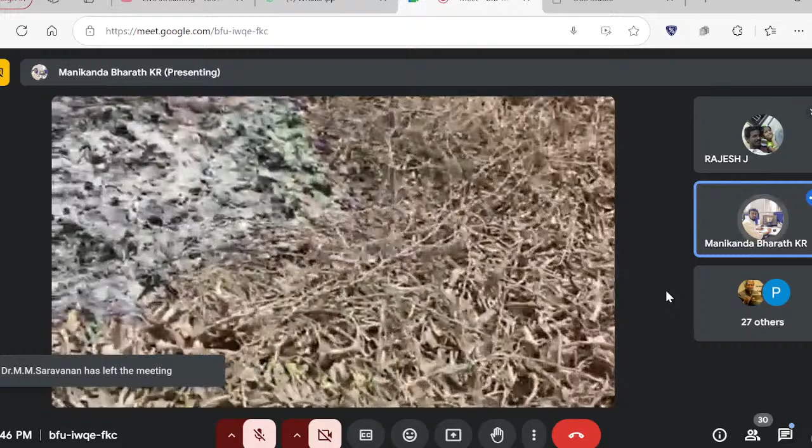And this soil appears to be a paleo channel of the Palar River, but it's showing the sand is looking like river sand. It may be. It looks like river sand, bro. It may be a Palar River paleo channel. So we can study about the climate also.

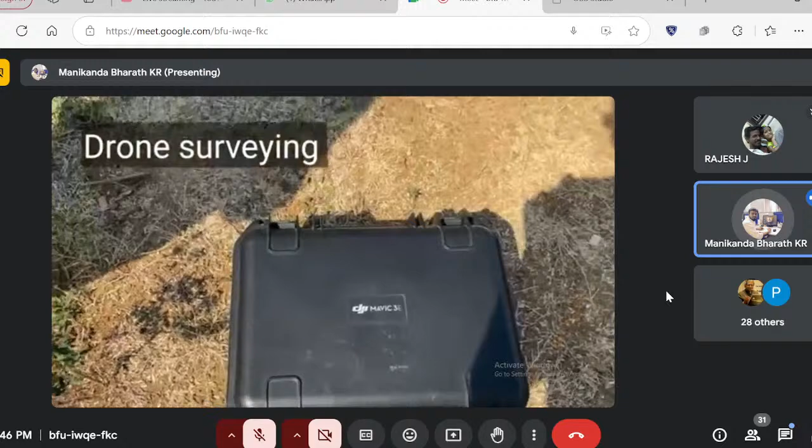For drone surveying, we are going to use this Mavic 3E. Before the drone flight, we have to establish our ground control points, and using the DGPS, we have to mark the boundary of the lake. How the RTK DGPS is done, we have explained in the previous video. We are just marking the boundary of the lake, that is the latitude, longitude, and elevation of the lake will be marked using the DGPS. So then we are moving on with the drone. Drone and RTK DGPS comes hand in hand.

DJI Mavic 3E transmitter. This is the transmitter. And this one is the battery. We have 4 sets of batteries.

This is the RTK module. For aerial surveying purposes, we are going to use this module. We can attain centimeter level precision through this module.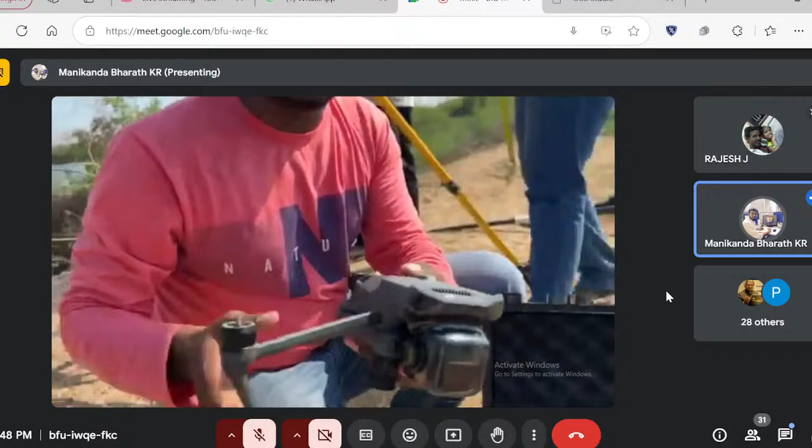Then finally, this is our drone, the DJI Mavic 3. Propellers are there. We are going to fix these propellers while flying.

This is a loudspeaker. We can broadcast our message directly through this drone in real-time. This is useful for crowd control, monitoring, and surveillance purposes. It is very helpful for police personnel.

Actually, it has two cameras. One is a wide angle camera, 20 megapixels. This one is a telephoto camera, 12 megapixels.

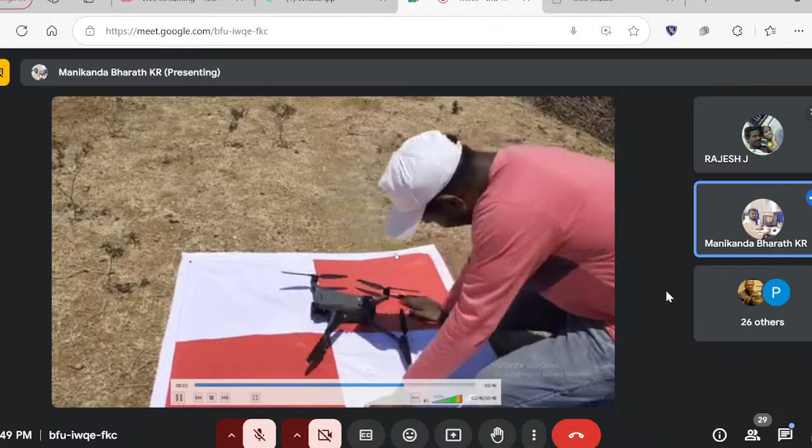Our team is ready with the drone surveying, pilot and co-pilot. The person in orange here is the main pilot and the green one is the co-pilot.

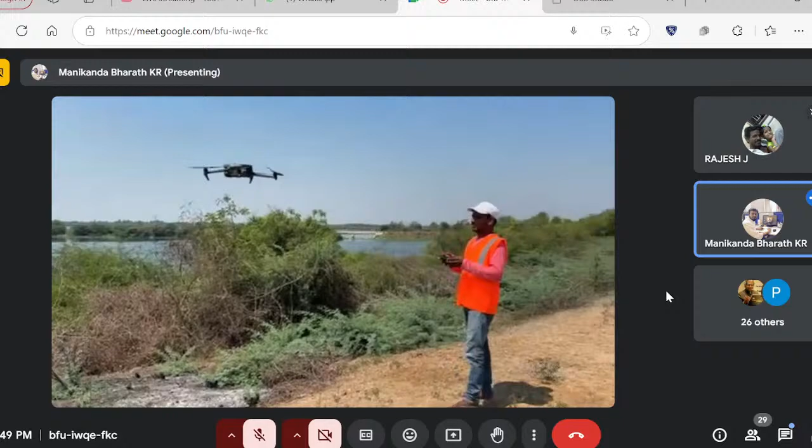He mentioned the co-pilot, right? So the co-pilot can be a geotechnical person also. This one is with respect to the lake, with respect to mining, with respect to some underground work, with respect to some earthwork on the surface. Using that for inaccessible areas, this drone can be flown and it can be viewed. The slopes can be identified, how the slopes are done. So the soil erosion can also be identified in inaccessible areas, in real time.

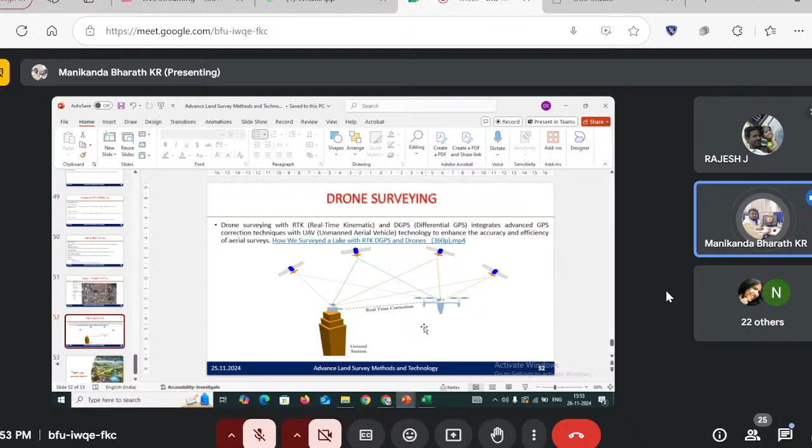That is with respect to collecting data in real time. That data will be processed, and it will be explained by my colleague Chanley Jabari in the form of lake front development and digital twin. That is with respect to drone surveying and RTK DGPS survey. So that is the three Ds: DGPS, drone, and digital twin creation.

In the span of 2 minutes, I will go through the data collection, DGPS survey, and data processing. You can see the primary ground control point nearby, SOI BM. So this is how the collected data is overlaid.

Base station establishment in site using a known point, the Survey of India point. You can see 8 to 36 hours observation at the site for establishment of the benchmark. That benchmark has latitude, longitude, and elevation.

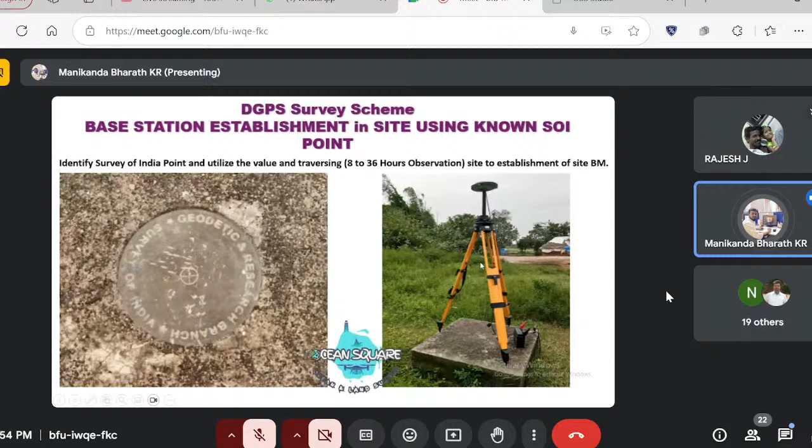With respect to DGPS surveying, you can see a village boundary with A and B stone values. These are the boundary stone value marks. So this one is ground truthing.

What is ground truthing? From satellite we would have obtained some values, the elevation. Using GPS on the ground, we are cross verifying whether those values are correct or not. That is ground truthing.

Then FMB, field measurement book, and village map procurement. These are geo-referencing and mapping. So you can see here, this is drone UAV photogrammetry technology, with flight plan and aerial triangulation.

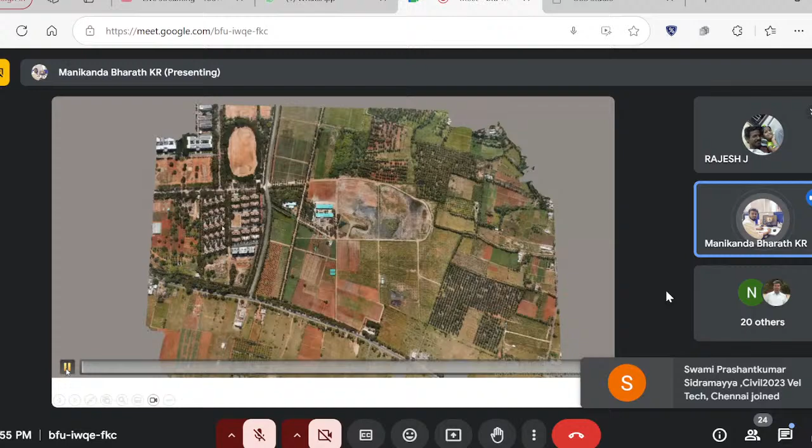So this one is the aerial view. You can see how it is processed.

The software Pix4D and Agisoft are softwares in which the drone aerial images can be processed. So you can see the elevation also can be obtained.

But for this, RTK DGPS is also essential. It is used for geo-referencing. That is, a known point will be taken with latitude, longitude, elevation, and from that known point, another point will be fixed. Using that, the drone will be mapping those values.

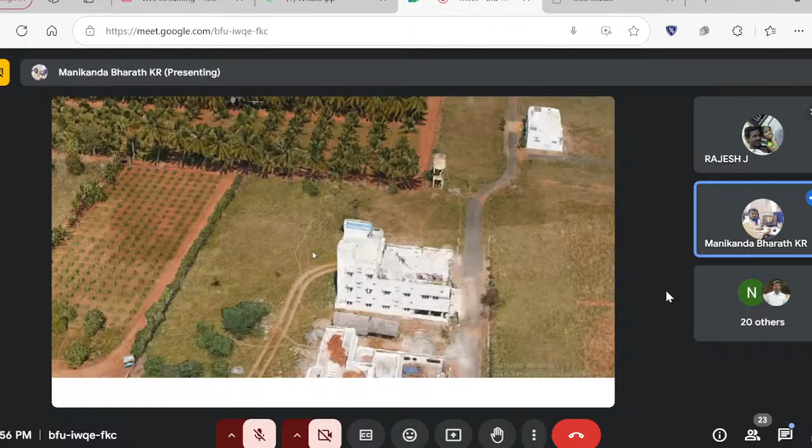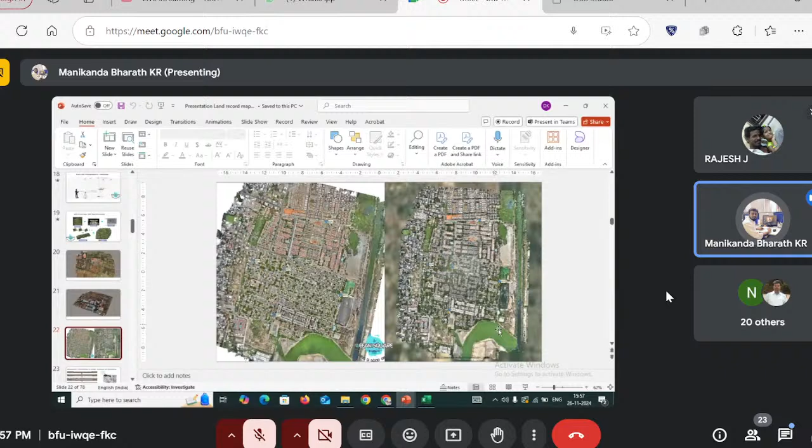So far, with respect to geotechnical engineering, we are just involved in a project of earthwork volume calculation, that is cut and fill only. We have not moved on to further geotechnical investigation projects.

So you can see here these are the ground control points available. This is an aerial view of this. So dealing with confirmation of village boundary - this is village boundary marking. These are the points you can see here.

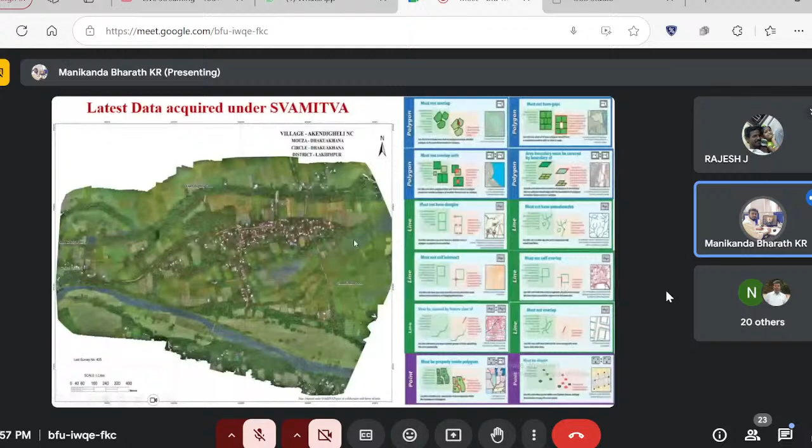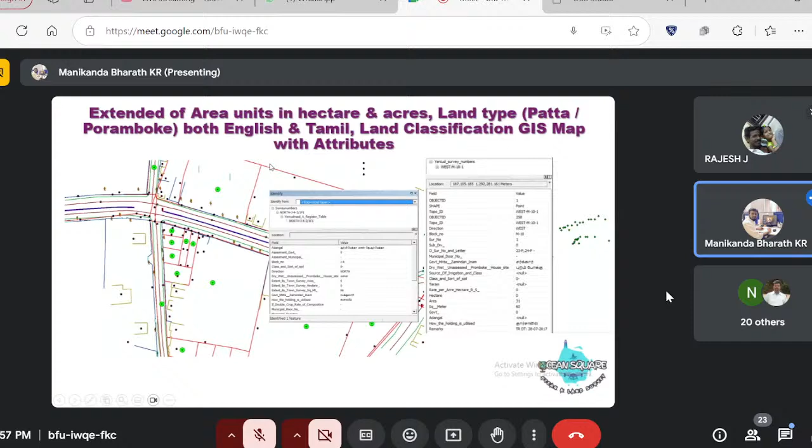With accuracy and precision, we can obtain these values to scan the village maps. You can see here high resolution imagery using, and so on - these are GIS data.

You can see this is the attribute, by just clicking on that place, that is a polygon. You can just click on it. You can see this is attribute, non-spatial data.

Imagine it in a form of borehole information. If you just click on a borehole point, you can just feed all the data of that borehole, and you would get a bore log report. All those data can be filled in this as an attribute - the depth of each soil layer, soil type, at what depth it is available, the groundwater level, all those things can be fed in this.

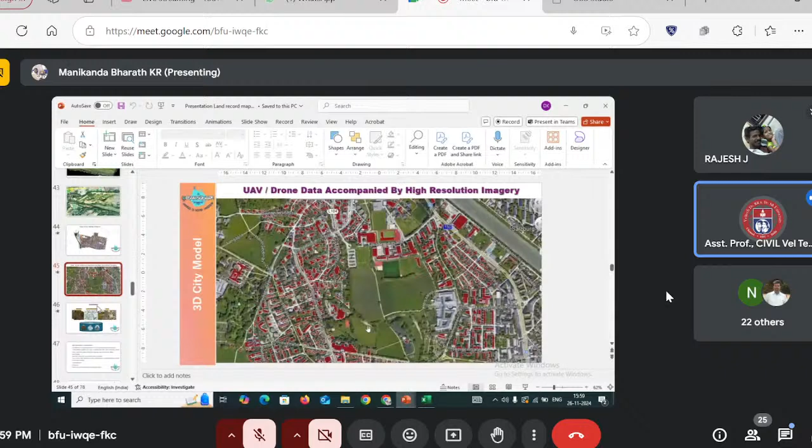Sorry to interrupt, sir, we are running past our schedule. Okay ma'am, I'll just conclude with this one, 30 seconds.

Yes, so that's what I wished to share with you guys. Thank you for the patient listening. With any doubts, you can ask. Thank you.